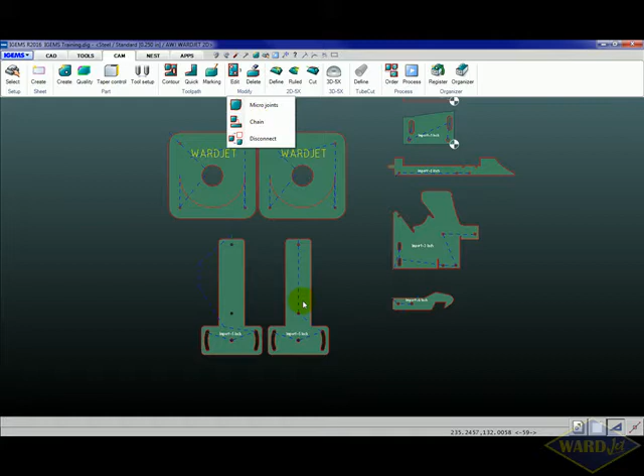So if we want to use one pierce and cut these two pieces here, we'll go to the chain command. You can specify what sort of cut quality you want to use on the cuts between the parts, which you can do either rough or extra rough typically, since you don't care so much what that quality looks like.

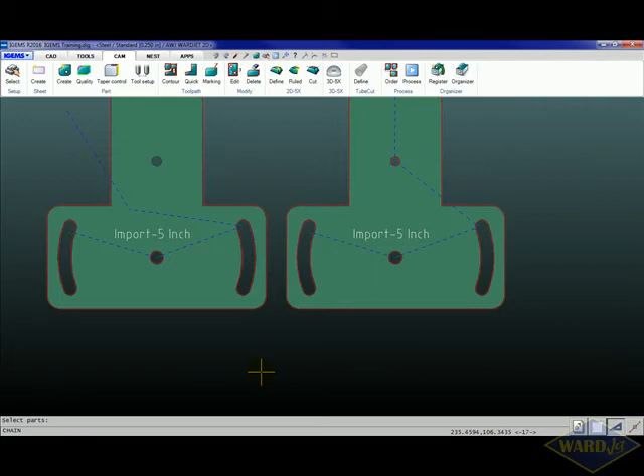And now it's prompting me to select parts, so you just click on the parts that you want to connect with the chain. So we'll click on this one, and when we're done, just hit enter.

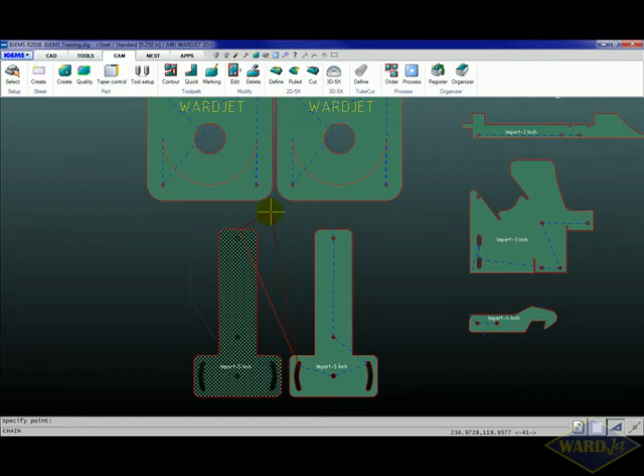And enter again. Now it says specify points, so essentially it wants to know - right now it's a little bit deceptive because it's got this red line going from the outside of this cut to the inside of that cut. That's not actually what it's going to do. It's going to try to go from the end of this cut to the start of this next cut over here.

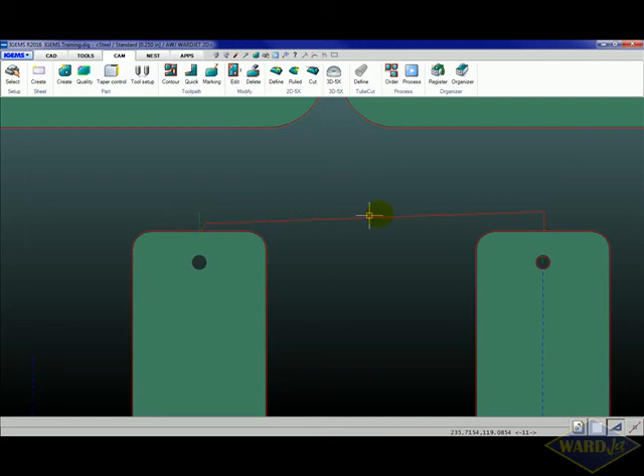So essentially it wants to know when it's done over here doing the lead out, where do you want it to go. So you might want it to move a little bit away from the part, so you can click up there, and then can do more if you want to, otherwise hit enter. And then when you exit out of the command, it'll draw that connection line between the two pieces, so the jet will stay on and come over to here and then lead in.

So obviously if you're going to do that, you want to optimize your placement of your leads.

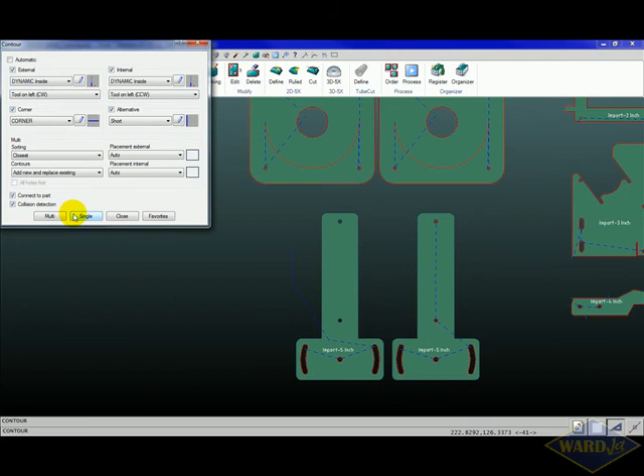So we'll just use our delete command on these two, get rid of those leads, and we'll just put in new leads now. So we'll put one here.

If I select my snaps, we can put one here, we can put one here, and then we'll just hit close. We'll go back to modify and back to chain, and we'll just stick with extra rough this time.

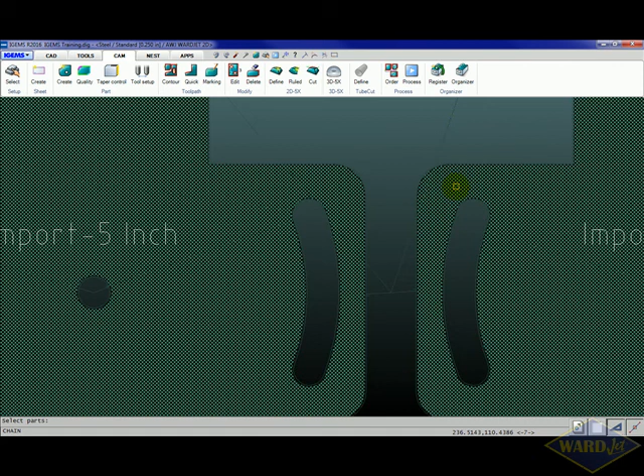So we'll click on this part, and then hit enter a couple times, and then specify point, which this one here, we're just going from the end of the cut here over to this cut here. We can just hit enter.

So this will be the lead in, and then this red line is the lead out, which is then connecting with what was the lead in before. So that's the chain command.